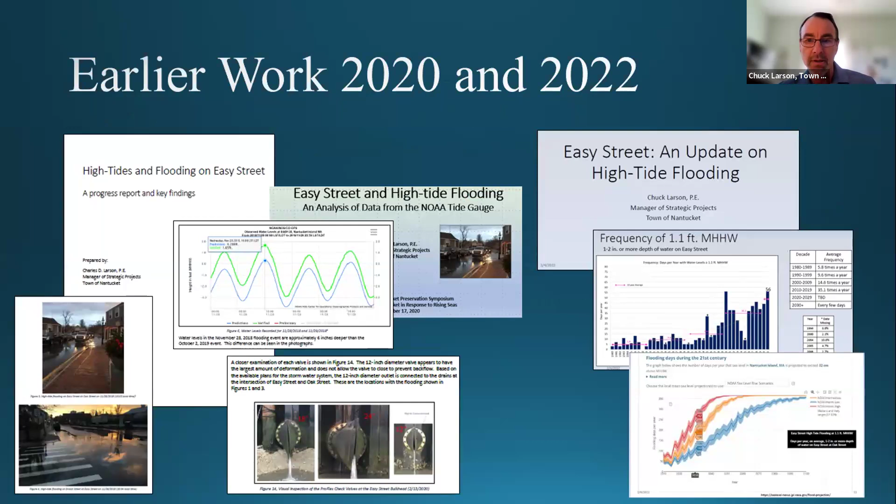Some of my earlier work really looked at the past 35 years, but what's unique here is actually having a complete data set of 60 years. So I'll be sharing that information with you, and also some of the statistical analysis, exceedance analysis, really focusing in on looking at the data in 19-year epochs to average out some of the tidal harmonics, residuals, climate effects. So this is raw, unfiltered data, very statistically sound. NOAA validates this data before they publish it, so it's actually really good data to work with.

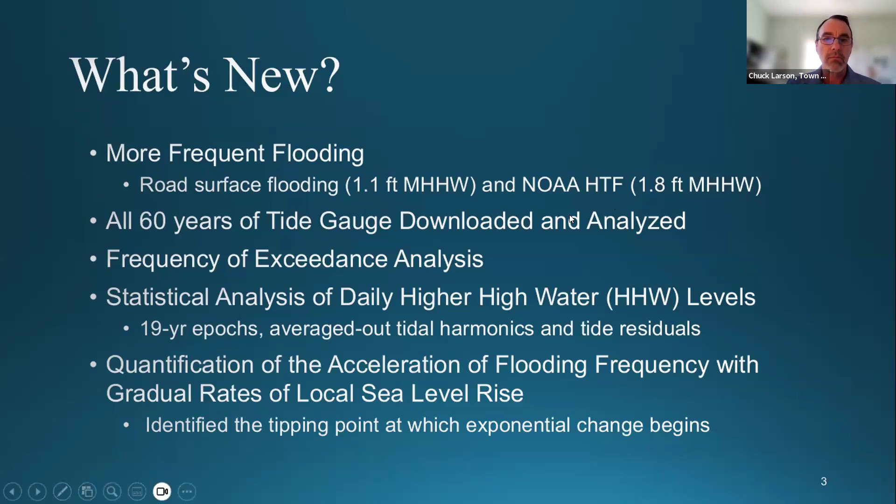And what comes apparent, looking at the data, is where we have an acceleration of flooding frequencies as sea levels rise. So I have some graphics to help explain that. This is very similar to a chart that NOAA publishes on their website, showing the change in local mean sea levels over the years. Very simple regression analysis shows that we're increasing at about 0.0136 feet per year, 0.8 of a foot in 60 years, or approximately 10 inches.

That's the trend that's with the data now. You do notice there's some interesting variation year to year in the average, in the mean sea levels, almost 0.2 of a foot at times. And there's certainly something going on toward the upper end of the curve here. We don't know if that's going to bounce back to the mean or what, but it's interesting to look at how it does bounce around the trend line.

This is very similar to some of the graphs I've shown before. The data going back earlier than 1980 shows a very consistent trend of frequency at this water level of 1.1 feet mean higher high water. That's water that essentially starts to cover Easy Street at Oak Street, curb to curb, to a depth of about 1 inch. Maybe an early stage of nuisance flooding, but it's a readily observable water level, and hence was established for tracking and reporting.

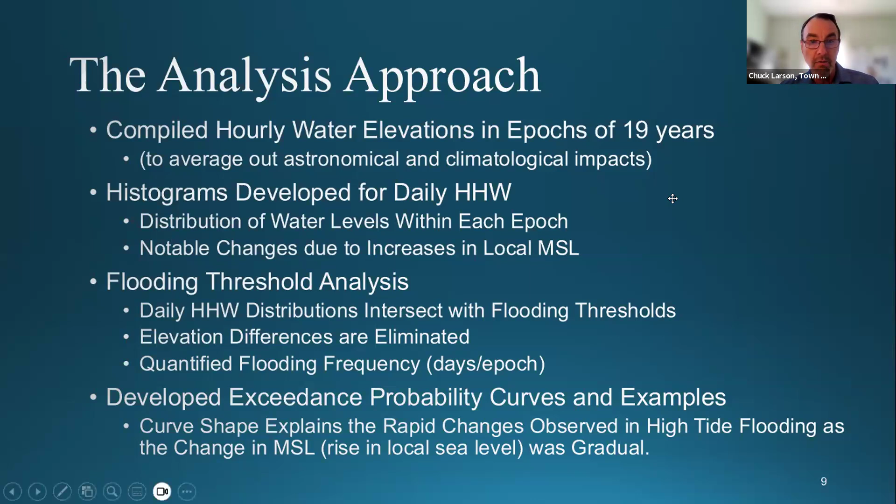As I mentioned earlier, I assembled the data into epochs of 19 years. I developed histograms to show the distribution of the daily higher high water level. We'll be able to see some notable changes due to increases in local mean sea level. I looked at the thresholds and how they intersect with those distributions, which can quantify the flooding days, and then some of the exceedance probabilities that I'll show with the curves in the graphics that follow. This is just some of the raw statistics you'll see in the later slides demonstrated graphically.

There are 3 epochs — those are the time ranges, epoch 1, 2, and 3. There's a midpoint year of the epoch that usually is a reference point for the data within that epoch. In terms of the number of records with elevation data available for analysis, very high percentages, especially in the later years.

Computed the mean higher high water elevations, and these are referred to with the Nantucket station datum. You probably haven't seen this reference before. It's a reference that's really time independent - it exists for the tide station, and it'll never change.

Whereas some of the references we have for the datums will change over time. Certainly the datums tied to the tidal epoch, mean sea level and so forth, get updated every 19 or 20 years, so those change. The geodetic datums are set to change as well, such as NAVD 88. And the research I've been seeing lately has referred to the tide station datums as that consistent measure that will be in existence 50, 100 years from now, so there's no confusion when I say mean high water - what epoch am I referring to?

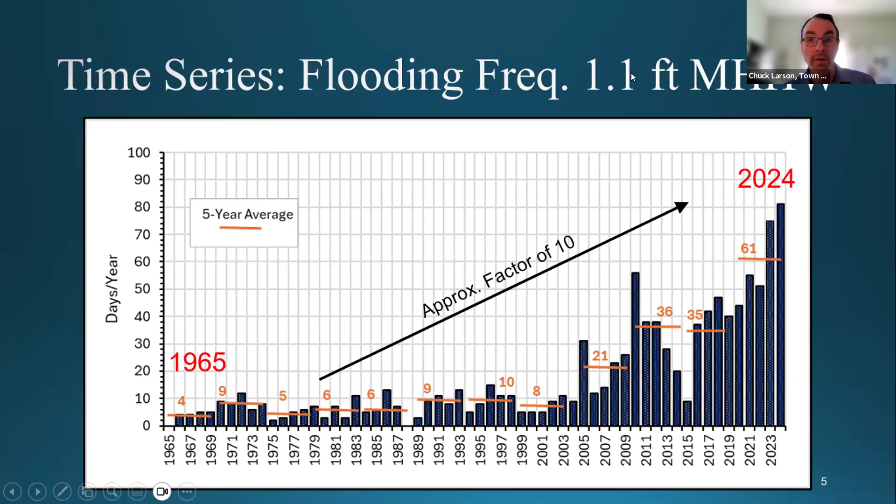These are some of the trends that we saw again in slide 5 and slide 6. What we see here, probably for this NOAA threshold, is that changes are going to be happening at a faster rate. But essentially everything we saw in this slide is going to be the pattern we see begin here—in terms of frequencies, we're at 10 or 12 events per year, but we're going to be seeing the same kind of changes, the same amount of inundation, but at this higher flooding threshold. So that gives us a better sense of the timing for changes, especially at that higher flooding threshold.

And I think nicely, this helps tell the story of what we're going to be seeing in the future based on the past data. That's really the key message I wanted to share with you, based on data at the tide gauge right at our front door, so to speak.

A few more slides. This is another way of visualizing the data I've presented. If you've been on the tide gauge website, you can see the graphs of water levels and what they forecast versus what the actuals are over time. This is just a sample day that I grabbed with a screenshot.

Over a 24-hour period, you've got 2 high water levels—a daily higher high water and a daily lower high water. The daily higher high water is the water level that I would analyze.

To scale, I have inserted the distribution of values for the last epoch. This tells us that during the last 19 years, all the water levels fluctuated—the daily higher high water level fluctuated in this range as recorded. There are times when it exceeded the threshold of 1.1, and fewer times at 1.8.

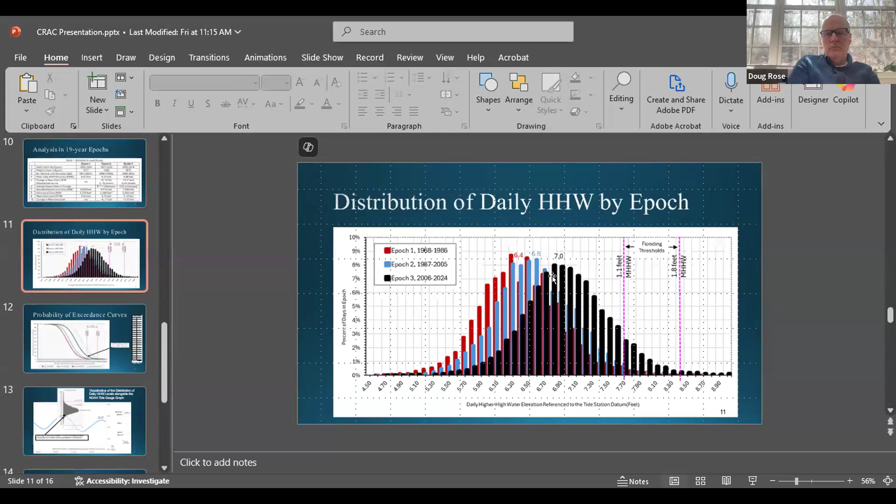There was a slide, I don't remember which number, where he's showing the... keep going there, Chuck, there, right there, one more forward. Yes, there you go, there you go.

Thank you, Chuck. I just want to make sure I'm interpreting the black line correctly, that what we're looking at here is the data cumulatively for an entire epoch. And what we're seeing in more recent data, say the past 5 years, would be to the right of that black line. So we're already migrating toward the magenta dotted line, correct? Correct, yep. Each year that line is stepping closer and closer, shifting to the right. So these are just distinct steps in time, with 19 years of data behind it to accommodate for the variations we see.

And just doing the math in my head, if 10% of days are beyond that 1.1 foot flood level, that's basically 36 days a year on average. And what we're saying is that within the next epoch, we're going to be seeing an average closer to almost 30%. So call it, I can't do the math... It'll be 100 days a year where there will be some kind of nuisance flooding, at minimum.

Thank you very much, that was great work. The center point of that future epoch is 2035, so 10 years on average you're going to be looking at that, and it could be even sooner. This just reflects the urgency of planning and taking action. Otherwise, you're going to be working underwater, and that just means a larger scope, more cost, longer schedule.

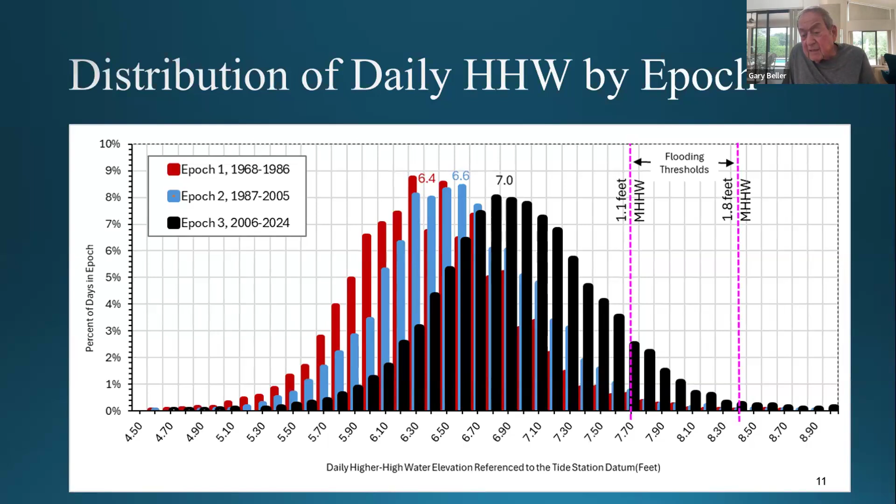Let's talk about what Joanna said, and what you talked about, which is what happens in 2030. That's only 5 years away, not even a full 5 years anymore. When we say there's going to be flooding approximately 50 days a year, the question I have is: are we able to say comfortably that on these 50 days those trucks won't be going down Easy Street or Washington Street because the flooding will make those roads impassable? Or are we just talking about some slight uncomfortable water levels?

To the extent that it stops commerce completely, 50 days a year is a lot, and it could be a little worse as well. So should we feel comfortable making that clear when we talk to the public about the reason we have to take steps sooner rather than later? How about that?

Yeah, no, thank you, that's a great question. Certainly this is something where there's no one right answer. But the threshold I used for 1.1 feet is really wet feet, right? It's just beginning to show a problem.

Cars are driving through an inch or two of water. It's not going to stop commerce, but as you get to maybe 4 or 5 inches, some cars probably shouldn't drive through that if they have low clearance, or maybe electric vehicles, that kind of thing. Then you're getting saltwater exposure and so on. But it's probably something closer to 1.8 feet that you would be closing the road. 8 inches of water on Easy Street would definitely stop use, except for the largest of vehicles, so identifying what that water level is that would stop the use of Easy Street is important.

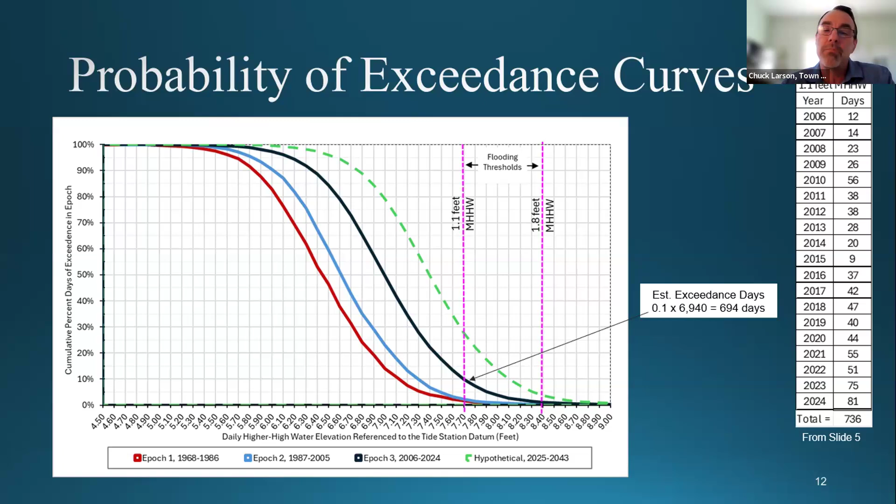I think that's a good item to develop, to have a consensus on what that is. But the literature I've read, and I quote some of that in the paper, is closer to that 4-inch range, where you would consider it impassable for cars—again, for the lower cars, but some cars can go through 4 inches. I did not necessarily get into that, but you could go right between 1.1 and 1.8 feet as the threshold you'd select to close the road. I have further information on that if you'll accept it.

Yes, well, through the chair, of course. Yeah, go ahead, Vince, and then I have a question or two.

Thank you. So over the years, I've spoken to the police department about this, and their view, or at least under the previous chief, was very simplistic. They wanted to look at the lowest common denominator. They don't think about whether an articulated truck or a big raised Ford F-150 can make it through. They just think about it in terms of a normal car. If a normal, regular car can't make it through, it would likely block the road anyway, so you close the road before that happens.

That happens to be around 4 inches or so, sometimes upwards of 5. They don't think of it in terms of a bigger truck being able to make it through and leaving the road open while directing cars away. They close it when it gets to about 4 inches, and that's it. That's when the barriers go up and all traffic is redirected.

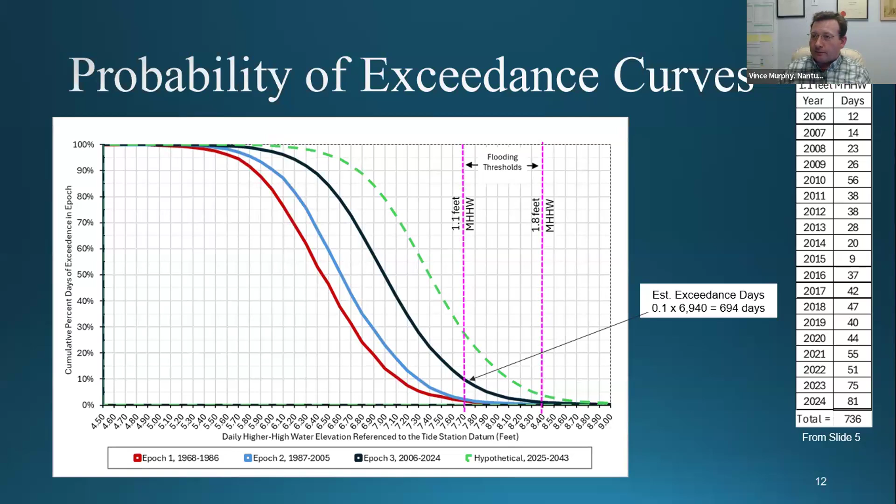Yeah, thank you for that, Vince. Thank you, Mr. Chair. Okay, thanks, Vince.

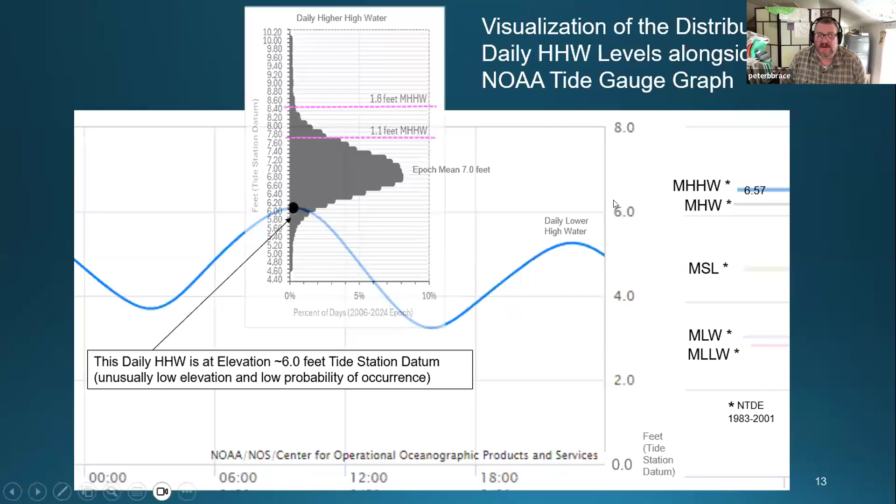Number one, the slides at the end where you summarize - can CRAC and Leah Hill use this? This kind of goes to what Gary was saying. I'm not a math person at all, and I can't read graphs, and I understand maybe a quarter of what you're saying. I get it, but when we want to talk to the public, do we refer to this slide here, the takeaways?

When we want to respond to what people are saying about our next discussion, which will have to do with the Easy Street Flood Mitigation Project, and people have questions, and we want to say, well, Chuck Larson says this is his data, we can provide you with that data, but we need the distilled version. So is that this right here?

Yes, I'll share the paper with you, which probably speaks in more detail to some of these thresholds and phases, acceleration phase. But this is essentially the summary with emphasis on the saltwater intrusion, though you've certainly got the impacts to transportation, which are also a major issue. There's a lot more to add to this slide that's available, probably in the paper. But yes, by all means, feel free to use this - that's why it's here, to help support the urgency and the need for these projects going forward.

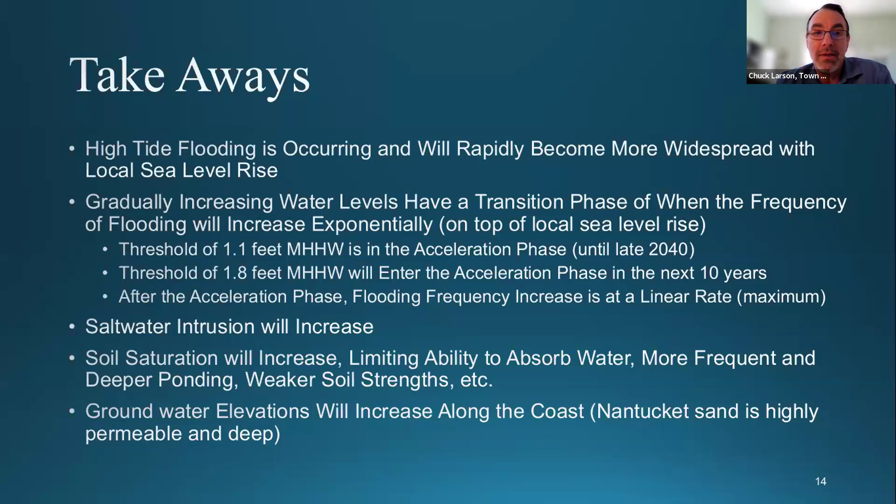Yeah, I've been sharing information with Leah, and I've been participating in that in the past, and certainly very important work, very near and dear to my heart too. So happy to help in any extent I can going forward.

All right, Chuck, thank you. Thank you, Doug. Are there any other questions? Are there any members of the public that have any questions?

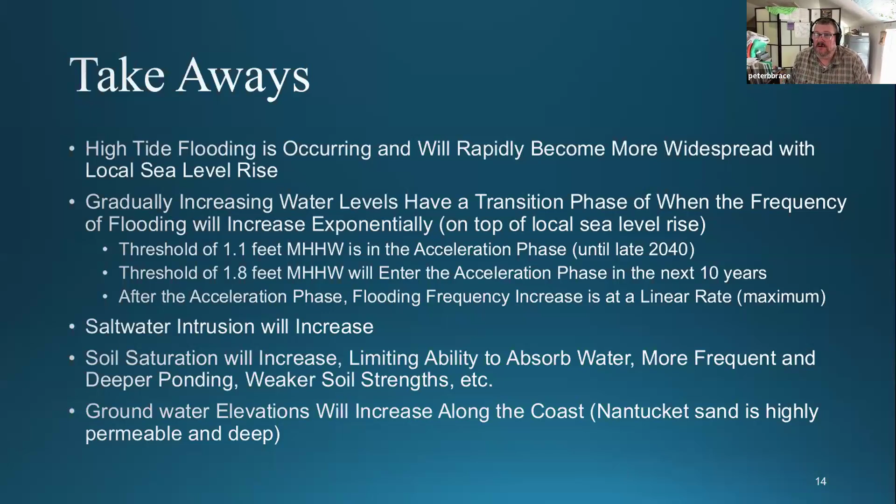Okay, seeing no questions and no more comments.

Thank you very much, Chuck. It's very, very enlightening for all of us, even for those of us who don't fully understand it. And thanks for taking the time.

Yeah, thank you, Mr. Chair. Feel free to come back anytime if you have something to share with us, even if it's something small you think that we should know. Get a hold of Leah or reach out to me. Yeah, will do. Thank you.

Okay, moving on. Presentation and discussion on the Easy Street Flood Mitigation Project by Leah Hill. Thanks, Peter. And thank you, Chuck, for giving that great information to segue into this project.

Can everyone see my screen okay? Great. So today I'm going to talk about the feasibility study and design for flood mitigation on Easy Street.

This presentation is pretty much the same that was given last week at our virtual open houses. The intention of today presenting to CRAC is, if you weren't able to go to the virtual open houses or the select board meeting, to update you on the Easy Street Flood Mitigation Project and then get feedback from you all about the different design options. I'm not asking CRAC to vote on which one you think should go forward. What will happen is once we get all the feedback from the community open house, from you all, and other stakeholders, that will be compiled and synthesized, and then the staff will put a recommendation towards the select board.

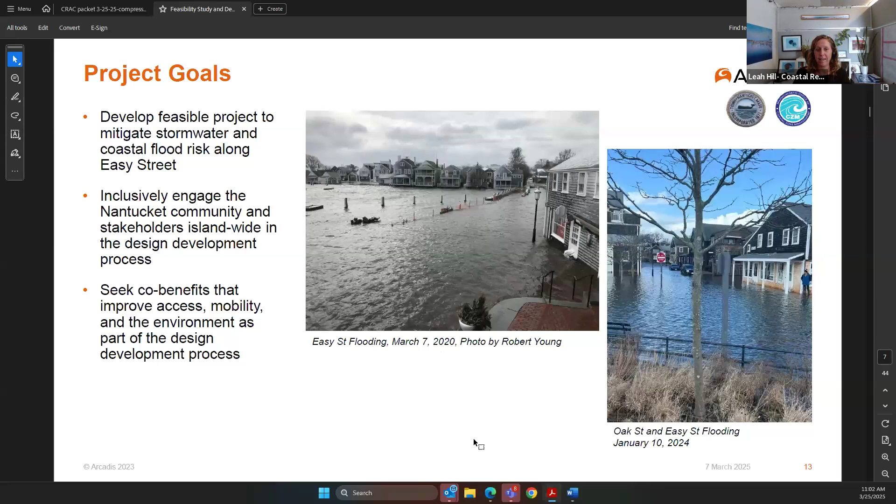For the project timeline, we are at the tail end of this phase of the project. It's funded by an Office of Coastal Zone Management grant that we got in 2024, and two tasks have already been completed: the existing conditions and flood risk assessment, and the feasibility alternative assessment. Community engagement has been throughout the whole process, and right now we're in task 4, which is to really hone down and take the conceptual designs and move one of them to 30% design.

Our grant ends June 2025, so we've got a couple months left, and the deliverable for that will be the preferred alternative to 30% design within a design package, and information on how to move that design forward and different funding options that we can pursue.

Just as a reminder, this is the first phase, the Easy Street project, and the Coastal Resilience Plan is the first phase of the overall downtown neighborhood flood barrier. If you guys remember, you voted that this is the highest priority recommendation to start because of the criticality of the road and the vulnerability of the road as well.

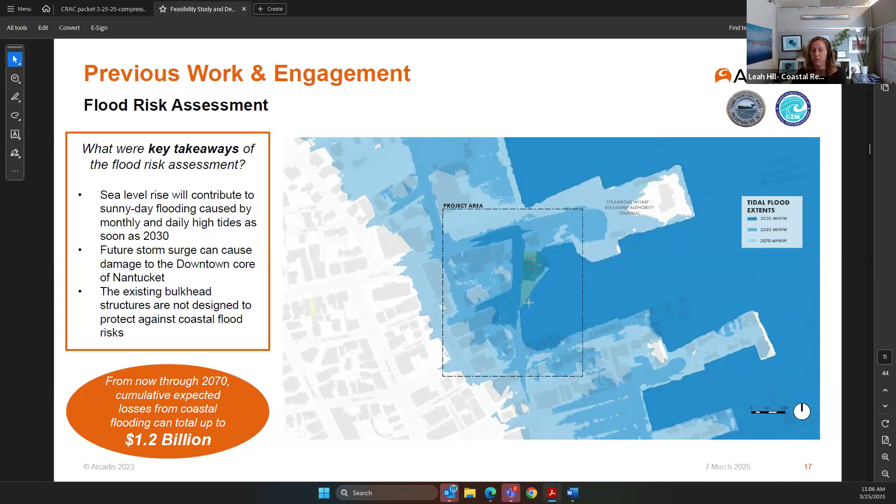So we had 4 initial concepts on here. These were presented to you before, and they were presented at the first open house at the Whaling Museum in the summer for community feedback. I'm not going to go into details about that.

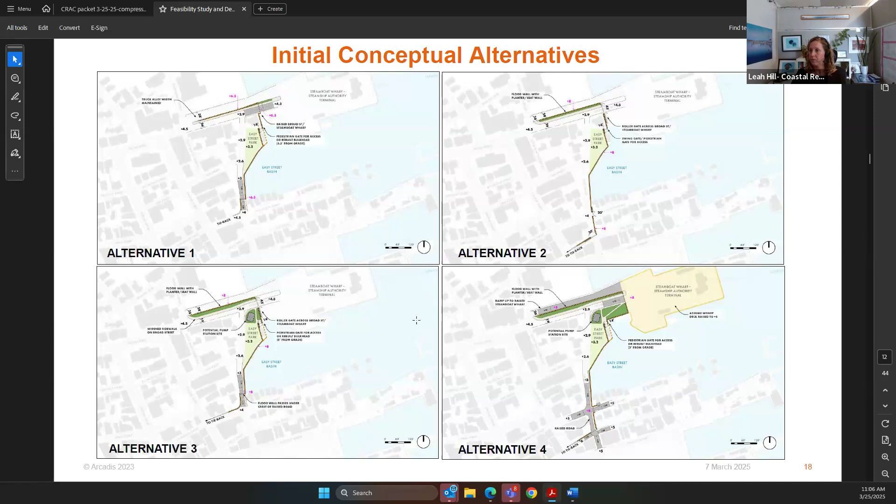The general themes we heard from that open house when we shared those concepts were broad support for addressing flooding issues on Easy Street, lots of concerns for stormwater flooding during heavy rain events in addition to tidal flooding, desires to incorporate nature-based solutions into the design, and interest in exploring new alternatives, including a raised Easy Street.

To get into the stormwater aspect of it, this blue area outlined here is the watershed for Easy Street -- it's quite large, about 53 acres, and it's pretty much all impervious surface. So the water rushes down the hill and consolidates at Easy Street to cause that stormwater flooding. The project aims to propose solutions to reduce some of the flooding on Easy Street that is caused by stormwater.

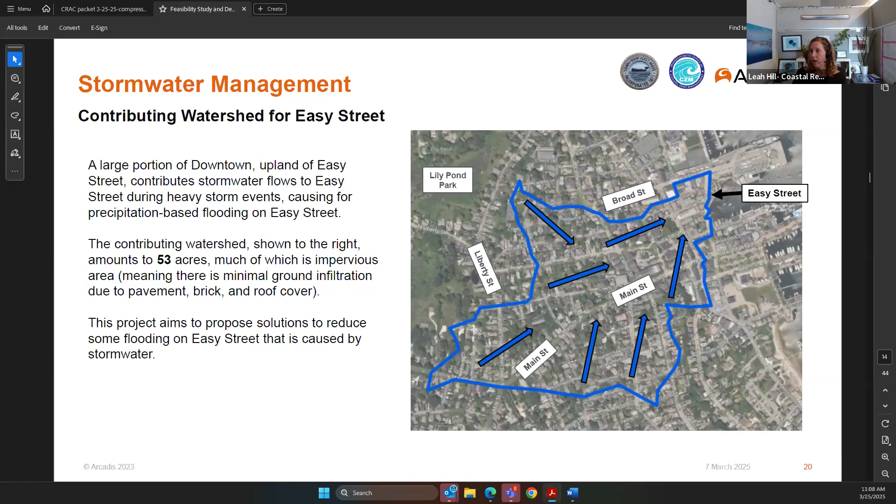Some of the options are to replace the existing duckbills on outfalls with functioning check valves or tide gates, and to create green storage areas where we can slow down the water upstream rather than rushing straight down to this area. With each option, there's going to have to be a pump station to pump that stormwater out and away from this area.

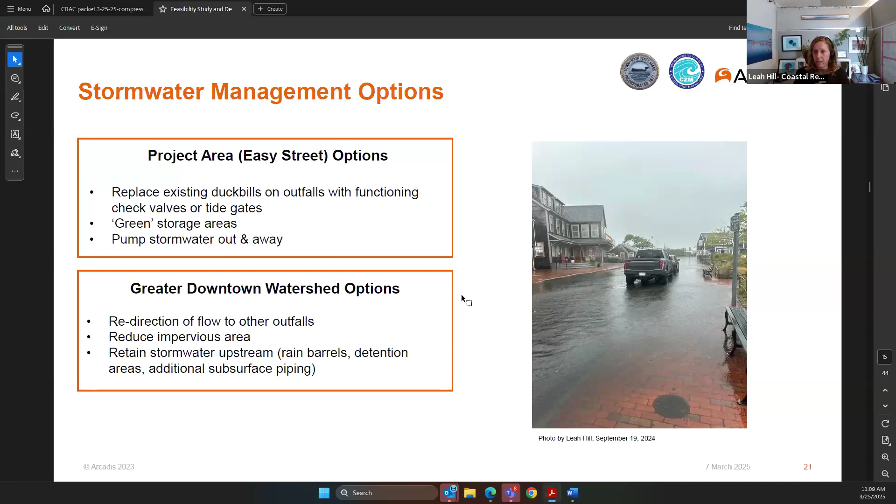The greater downtown watershed options are, again, to redirect the flow to other outfalls, to reduce impervious areas, and retain stormwater upstream.

I'll be talking about some different levels of protection when we get into the design alternatives. The lowest area on Easy Street is the existing surface, which is about 2.5 feet. The existing town bulkhead is about 6-ish feet.

The proposed road raising, which I'll get into, is 6.5 feet, and there's another alternative at 8 feet. The 8-foot mark, NAVD 88, is the high tide flooding expected as soon as 2070. The 6.5 feet is high tide expected as soon as 2050. The mean higher high water today is about 1.5 feet. So the high tide is really about a foot lower than the existing elevation on the lowest part of Easy Street today.

It's not shown here, but if you're on Easy Street wondering, is it going to be 8 feet above me? No, it is not. If you're on Easy Street, it's going to be 6.5 feet minus 2.5 feet, so about a 4-foot difference. If we're talking about the 8-foot NAVD 88 design flood elevation, it's 8 feet minus 2.5 feet, to get you to about 5.5 feet at existing grade.

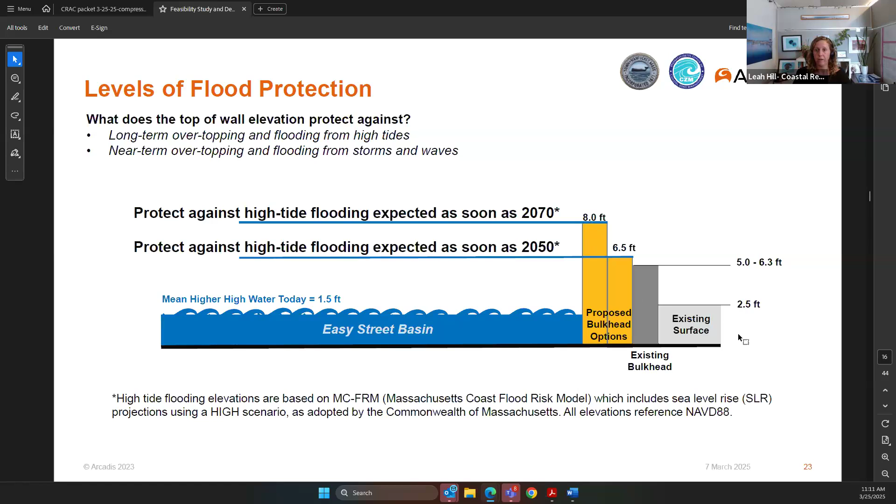All right, so project alternatives. This is just an overview summary of these 3 alternatives, and then I'll go through each alternative individually and talk more about it.

The first one is the bulkhead expansion and elevation. That is to rebuild the existing bulkhead to be higher and wider. It has some slight road raising, or think of it like an extended speed hump, at Easy Street, the entrance to Steamboat Wharf, and on South Beach Street.

The second is called adaptable road raising to 6.5 feet NAVD 88. That would raise Easy Street, including portions of Broad Street and all of the surrounding areas, to 6.5 feet NAVD 88. There would be small walls along the sidewalks in Easy Street and Old North Wharf area, and in the middle of Broad Street. We'll get into that later. This idea is really to build at a lower design flood elevation, with the intention to increase that elevation in the future when needed.

The third design option is road raising to 8 feet NAVD 88, which would include Easy Street, Broad Street, and the surrounding roads, with larger walls along the sidewalks of these roads. This one is build it now and have it last at least until 2070.

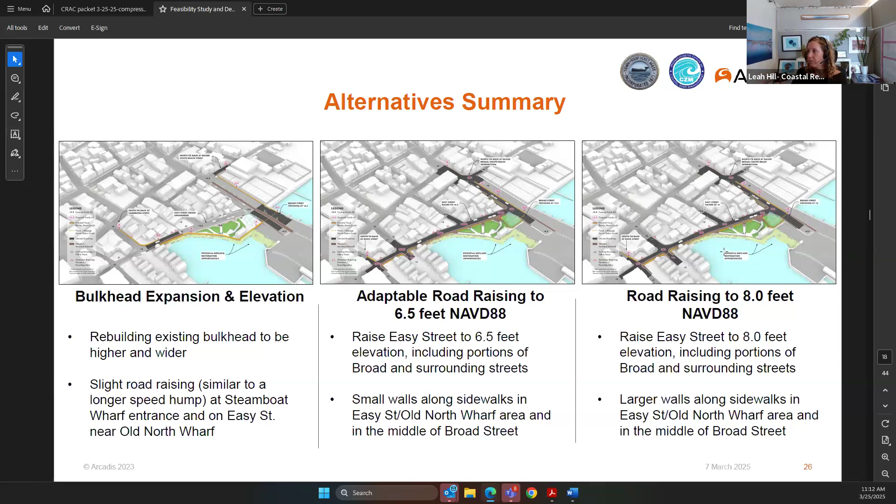For each alternative, there'll be a plan view, and then some 3D models as well to get a better idea of what we're talking about. The black numbers you see here are the existing grade. The pink numbers are the proposed grade, all related to NAVD 88. This gold line indicates the bulkheads. Right now there are essentially 3 different bulkheads in this area.

There would be 2 speed humps going into Steamboat Wharf, and that flood wall would essentially go under those speed humps. It'd come across to Truck Alley, between the Nantucket Yacht Club tennis courts and Truck Alley. Right now there's a cement kind of shorter wall there, so that would be elevated, replaced, and then it would tie back here.

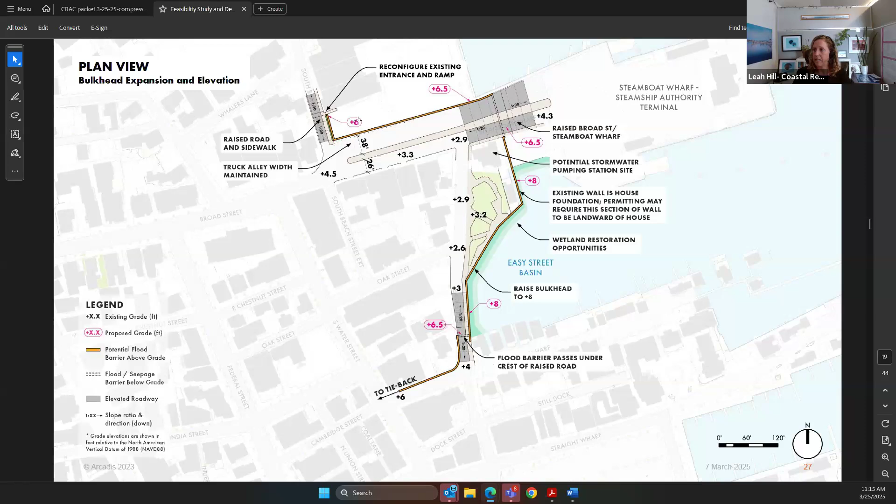There would be a speed hump on South Beach Street, and again on Easy Street, and there would have to be tiebacks on Cambridge Street here. The intention of these speed humps is to isolate this area and not allow flanking from either side.

Okay, so this is an overview of that with the 3D modeling. Again, the yellow or gold is the flood wall structure, and the black is the road raising or speed hump area. This is also showing that there could be opportunities for nature-based solutions within that area.

This is looking from up above, going down Broad Street, flood wall area, speed humps. There could be opportunity to redo the sidewalk area and allow for pedestrian access to increase, and then increase the pedestrian access going to the steamship.

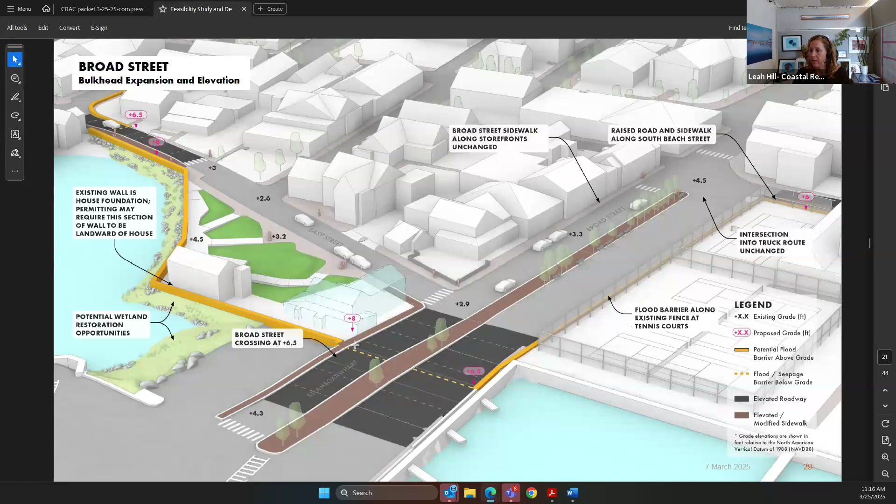This is from Broad Street looking out towards Easy Street Park. And I would say these are concepts, so there's no finishes or anything like that in these pictures.

So this is on Easy Street, that speed hump idea. There would be a little bit of a grade difference between the current sidewalk and that speed hump. This is Broad Street looking down towards Steamboat Wharf.

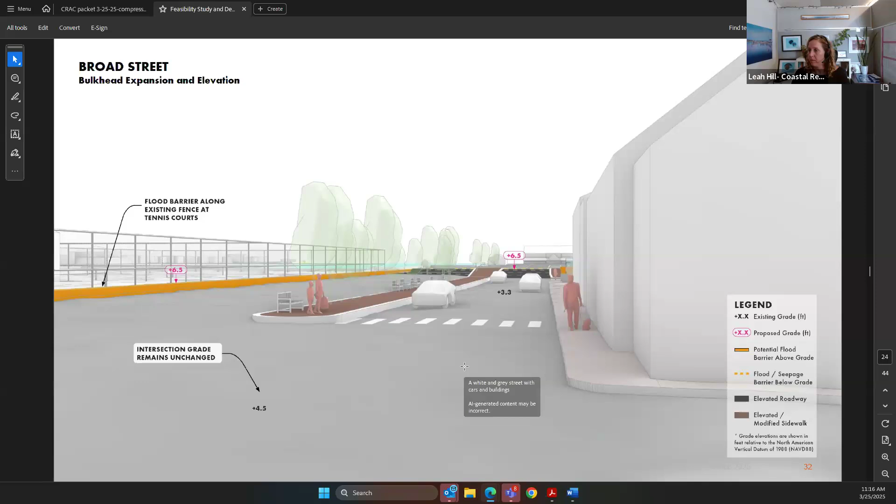Okay, so Peter, if it's okay to ask these questions, to have a little discussion between the different alternatives, or do you want to save the questions until the end for committee feedback? Well, we have one more item on the agenda, Joanna's letter. How much time do you think we need for that? And if we want to do this now, then when do you think we should stop to let the rest of the meeting play out?

Well, I would say that this is pretty time sensitive, and the letter is not as time sensitive. So in my opinion, I think more time should be spent on discussing this project, and the letter could be, either if there's time at the end, or it could be moved to the next agenda. Okay, all right, let's do it. Okay, so start the discussion now.

Yes, okay. So at the end of each design alternative, there'll be the same questions, and this is your chance to give feedback on the designs. I'm happy to go back to some of the pictures if you need to reference them. But we'll start with, what do you like about the bulkhead expansion and elevation?

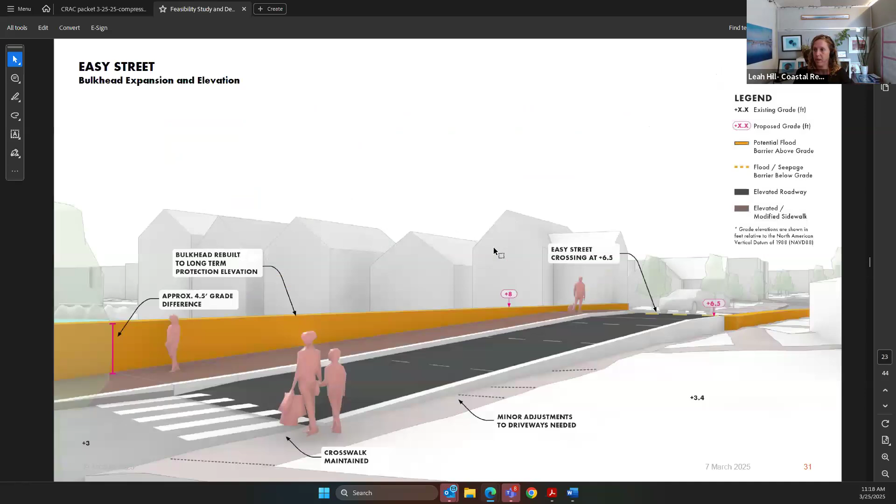Let me go to the overview so you can see it.

Peter, do you want to call on them, or do you want me to? I will. Okay, go ahead, Joanna. Okay, I think Sarah had her hand up first, so I want to be fair. She can go first. And also, I have some general questions about the whole thing, so I don't know how we're gonna do that. Well, all right, Sarah, you can go first, and I'll go back to Joanna.

Thank you, Joanna, and thank you, Peter, as chair. To answer your question about what I liked, I think the one thing that just struck me right away is that I like that it is a longer area. It's not isolating at one property. I think a lot of times previously when we'd seen things, it's like one person will do one thing and it's kind of piecemeal. I appreciate that this is obviously the whole area and that it incorporates that seepage barrier to go under the road. I'm interested to see if you have imagery, or if Arcadis did this, of what it would look like with flooding. I don't know how far you've gone into that visualization piece, but yeah, anyway, those are my two cents.

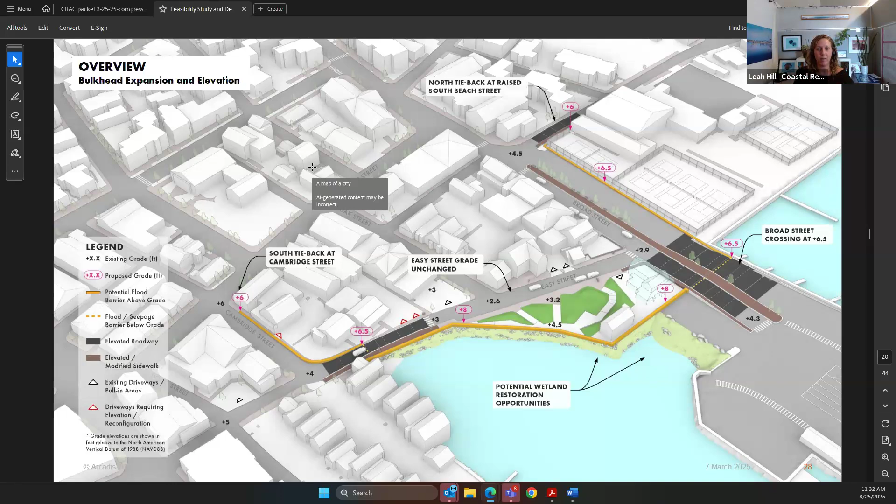Thanks. Okay, so I'll get through the other 2 design options, and then at the summary page, that's when I'll ask for feedback about what you like and what you don't like about the designs. All right.

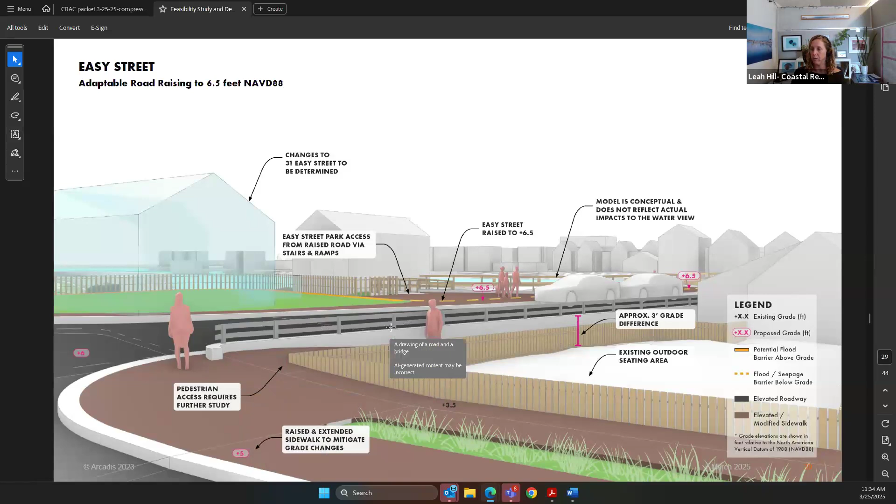So this is when you start to really see the difference of the existing grade and the 6.5 feet NAVD 88. At the corner of Easy and Broad Street, you can see that the sidewalk there and the road would be about a 3-foot difference. There will have to be some sort of safety guardrails between the road and pedestrians.

And then that delta is, again, 3 feet or so if you're in the area where the Dreamland is, going up to the road. It does show that on the water side, the sidewalk is at grade with the road.

This is at Broad Street looking towards Steamboat Wharf. So that intersection would be elevated.

Chrissy, to answer your question, the grade for Truck Alley would remain as is. And then the sidewalk area would have to be reconfigured, so it would slope down towards the buildings, and there would have to be stormwater infrastructure in here so that the rainwater is not just flowing directly into those businesses.

Okay, so that is the adaptable road raising. So again, that is you build to 6.5 feet today, which with the current sea level rise projections and using the Massachusetts coastal flood risk model would get us to that mean higher high water as soon as 2050. And then in the future, you could elevate that road more.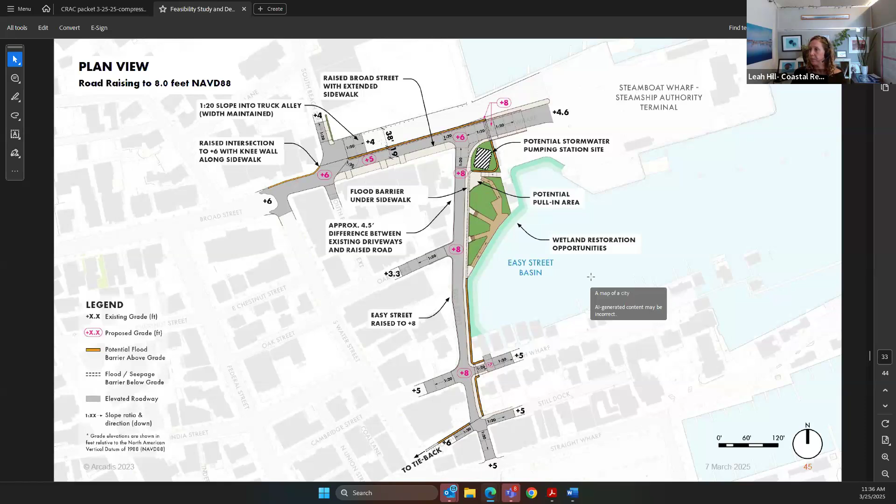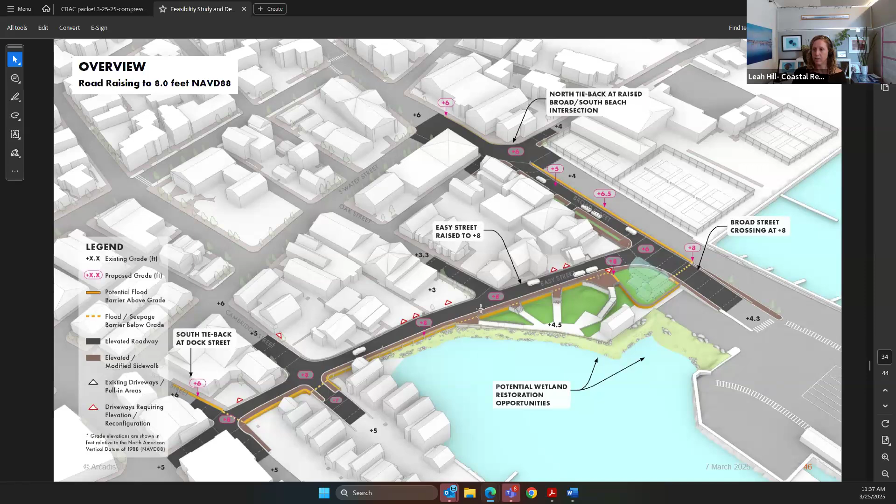Again, an overview. Black is the road raising, so all of the roads coming into Easy Street and Broad Street would need to be raised. The structures themselves, there's no town bylaw or regulation that says if we go with this, all of these structures need to get elevated. That is private property's decision to do it, or if they're substantially updating their house, they need to come up to code. So they would have to be elevated in the flood zone.

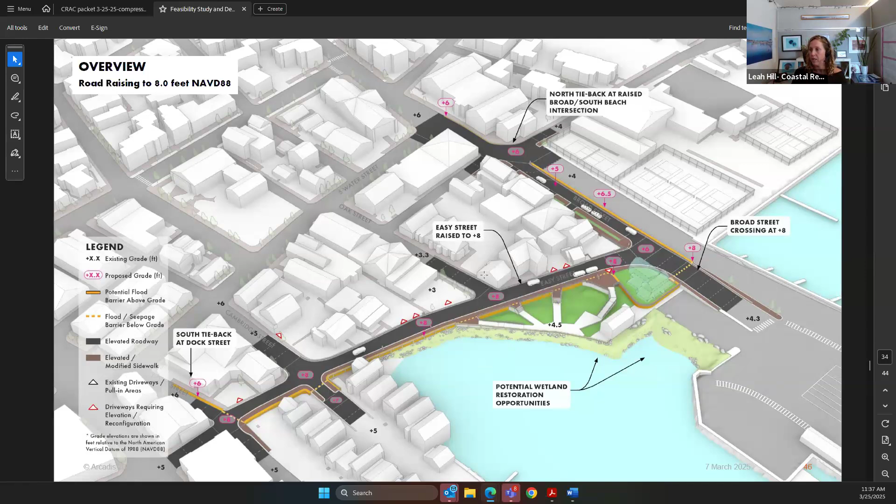What else is there? This also creates essentially pockets of stormwater to accumulate. So the stormwater infrastructure would have to be significantly updated to be able to accommodate these kind of pools of stormwater that would potentially happen in these pockets.

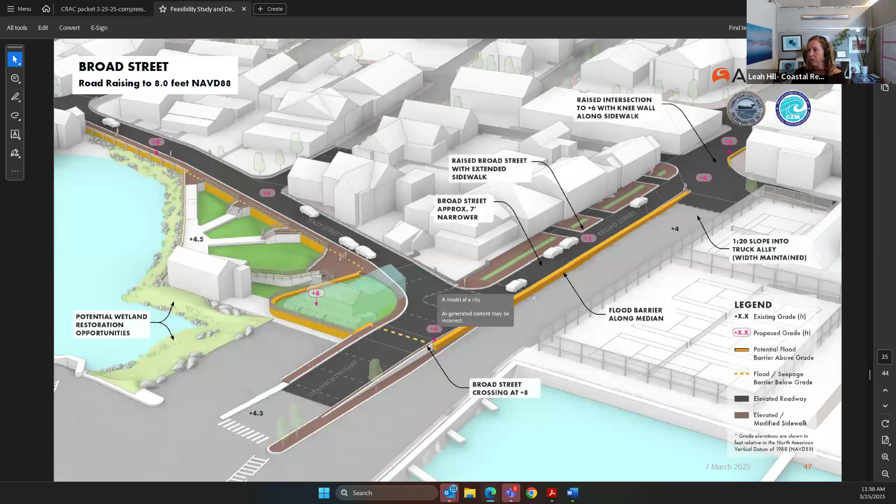Again, looking from Steamboat Wharf down towards Broad Street and Easy Street. And then at the corner of Broad Street and Easy Street, now that difference from the existing grade to the top of the road is about 4.5 feet.

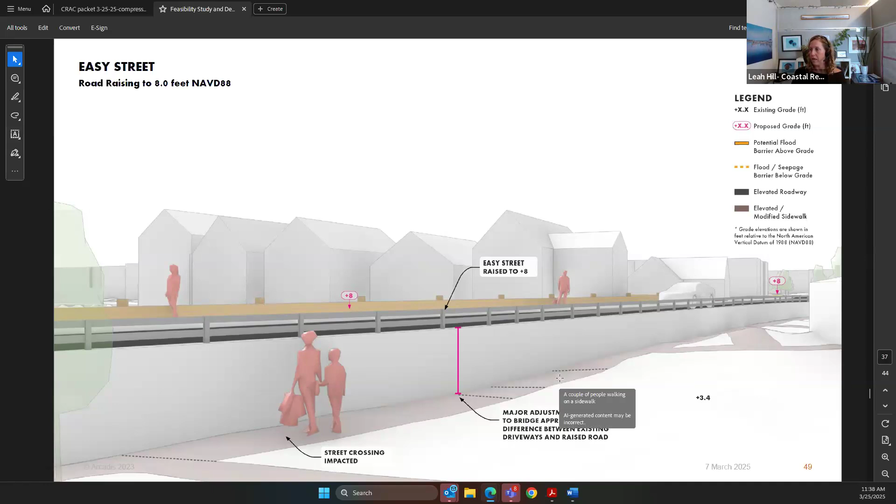At Dreamland, that is about 4.5 feet difference. And so pedestrian access would have to be rerouted and specific areas sited so that people could get from one side of the road to the other if it's not at specific intersections. Also, the private property driveways would have to be elevated as well so that they could remain.

This is the intersection of Broad and South Water looking towards Steamship. Again, essentially the same as the 6.5 view, but this is the 8-foot view.

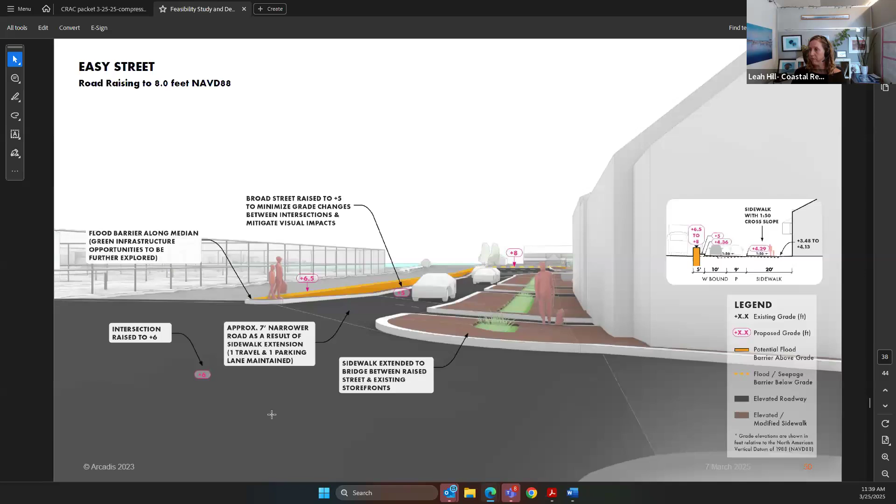Okay, so those are the three: we've got the bulkhead expansion and elevation, the adaptable road raising to 6.5 feet NAVD 88, and the road raising to 8 feet. Some of the attractors for the bulkhead expansion: it rebuilds and expands the bulkhead to provide a consistent line of flood protection, which we currently don't have right now. It's designed to a long-term level of protection, so again, out to at least 2070. It minimizes disruption to private properties on Easy and Broad Street, so their access to their homes and their driveways is unimpeded. The detractors: it does not mitigate future groundwater impacts on the road, and it may require reconstruction of Easy Street Park.

The middle design, the adaptable road raising, addresses the groundwater impacts on the road. It includes opportunities to reconfigure pedestrian access, and as a lower level of protection, it's less disruptive to abutting parcels.

The detractors are that it requires adaptation in the future. Road raising requires reconfiguration of access to private and public properties and the abutting roads, and it requires redesign of access to Easy Street Park.

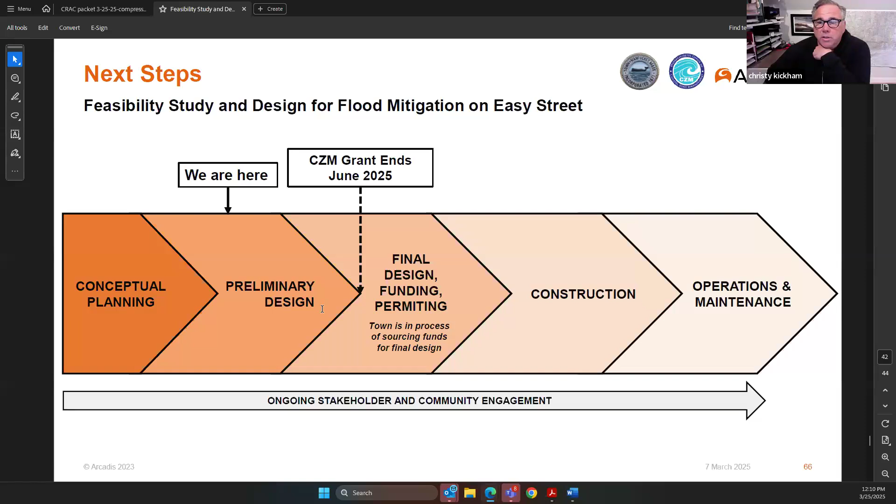I had to step off for Joanna's comment, so I'm not sure what she said, I apologize if I duplicate. But as far as option 8, I think the longer that you delay that model, you're really talking hundreds of millions more to do these projects. Obviously, we all know the sooner we do things, it will be cheaper.

And I think that it would prepare us better. I do think that the growing pains that we are talking about with the private sector and all those businesses would better be suited. Now, I understand this is a long timeline and pretty major, but these are big discussions, even for something like the first model, and to do the first model and then talk about the second and then the third.

I think you're just talking about major expenses and further bigger discussions when you could have a model that is well prepared for anything, any sort of event that happens. With that said, that's a big, huge commitment, and you really got to make sure that is the right decision.

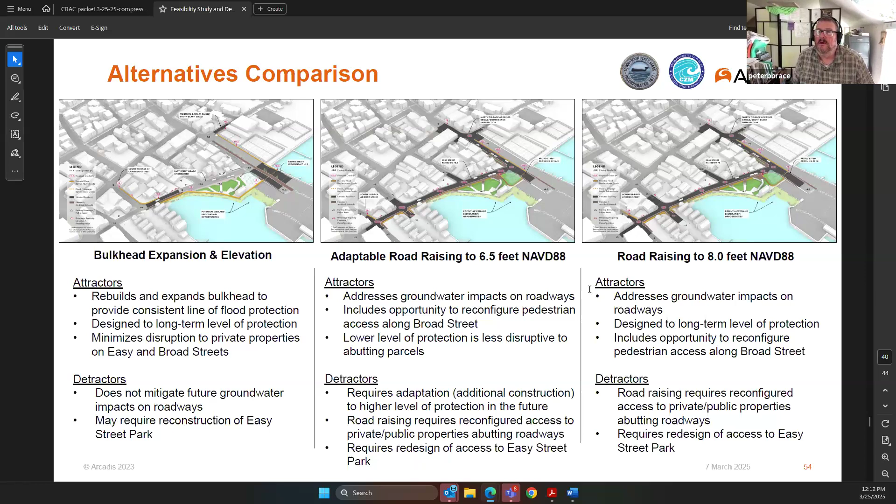So it really has got to be vetted, but that's sort of where I'm leaning. Thank you, Christy. Are there any more comments from staff and from the committee members? Seeing none, are there members of the public who would like to comment? Seeing no comments.

Do you think it's worthwhile continuing the discussion, Leah, at the next meeting? Has everybody got to say what they wanted to say? Do you want to take two weeks to look at the options and the presentation and then talk some more? Not seeing a lot of heads nodding, so all right.

We'll obviously get to Joanna's letter at the next meeting. And you have something to say under item number 8, Joanna? I'm sorry, Leah. Nope, I already gave that in the presentation, so we're good.

Okay. So I just gotta say at number 8, new business committee and natural resources department reports, planning board, Concom, SHAB, select board, advisory committee of non-voting taxpayers. Are there any reports from any of these representatives?

Christie? You're on mute. You're on mute, Christie.

Sorry about that. Peter, if I may, I just want to ask Leah if she was able to get some good information from that discussion from us. Are you in a good place now, or do you need a lot more from us on the discussion? No, I think those are all really great comments and questions. So yeah, I'm satisfied. But happy, if the committee wants to chat about it more, happy to do that on the April 8th meeting.